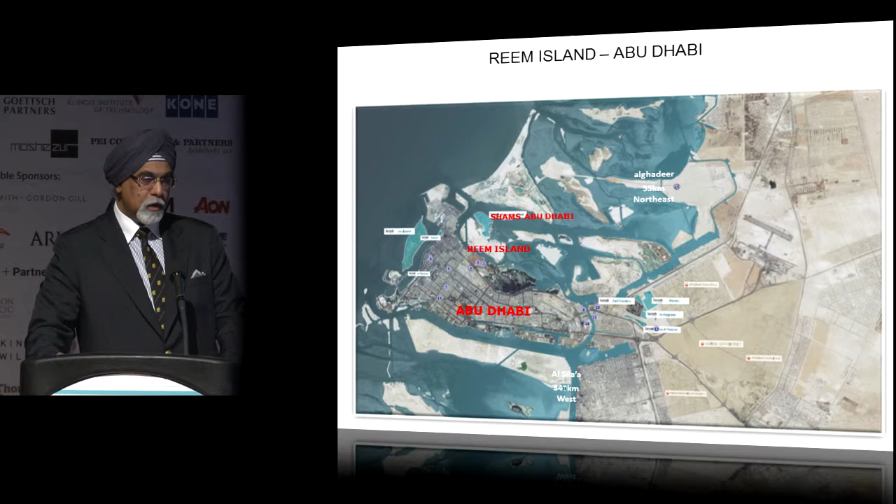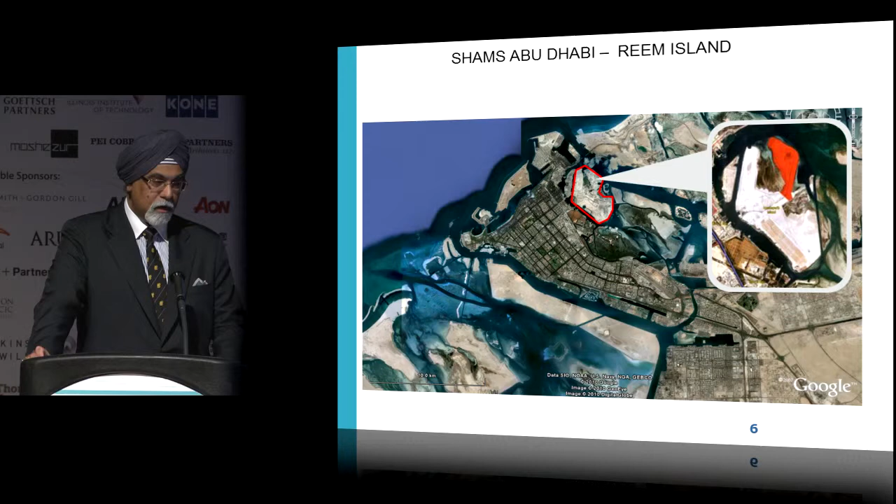Within the island of Abu Dhabi, there has been over the last few years an expansion of development in terms of new urban development as an extension to the CBD, and the Shams Abu Dhabi district is a newly created landmass that is adjacent to the current CBD, and it has formed an extension of the CBD in a very organized manner.

As you can see, the entire Reem Island, which is adjacent to the current CBD of Abu Dhabi, has three master developers developing the entire Reem Island. Aldar is one of them, and the slide that you see over here basically describes the Shams Abu Dhabi development, within which the Gateway complex occupies a very prominent and a narrow introduction to the Shams Abu Dhabi development.

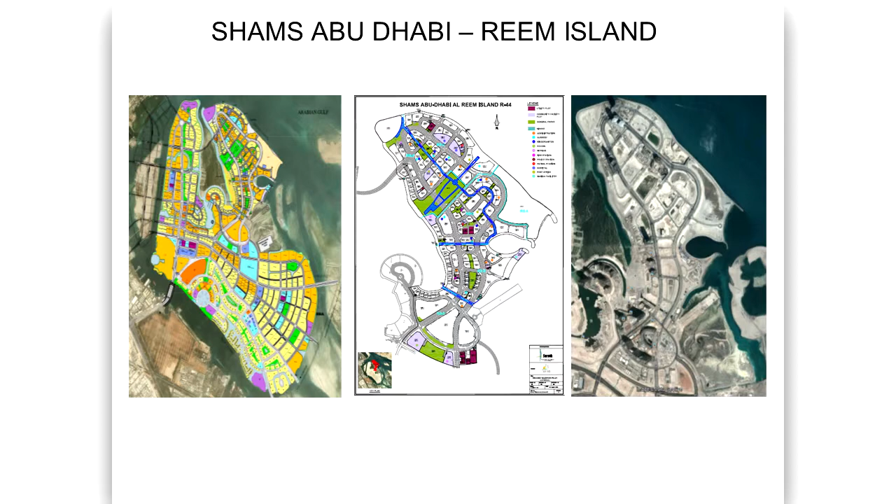If we try to look at it in more detail, you would see that the Gateway development comprises of three phases. The Sun and Sky Towers is the first phase, which is completed. The Gate Towers, which is the project that I'm going to talk to you about, and phase 3, which will be done at a later date.

Within the context of the entire footprint where the Sun and Sky Towers and the Gate Towers exist, the two towers, Sun and Sky Towers, are now complete, and I'm happy to say that it is about 95% occupied, and it has produced very clear, viable results for us. We have made a margin of about 21% on cost on this property, and an internal rate of return from the retained income properties that we have, including the retail and the office, of about 22%. So it has indeed proven to be a viable development.

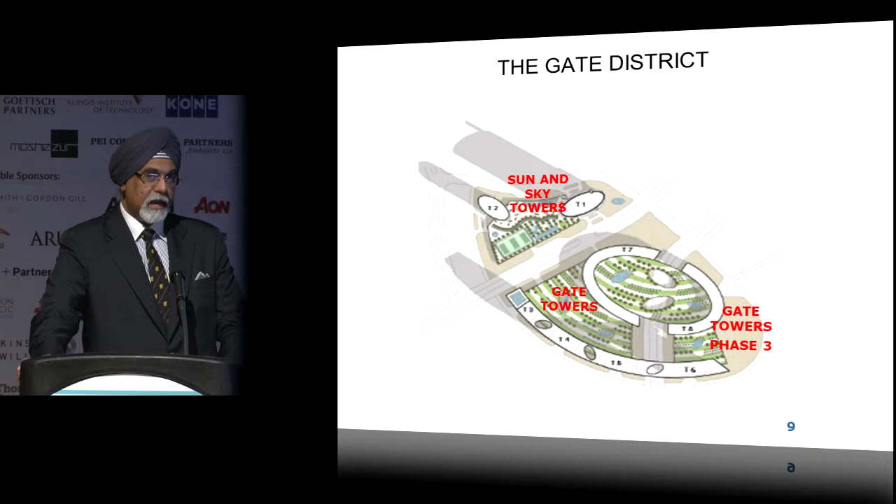And that set the stage for the creation of the Gate development. And this is particularly important because if you were to look at the entire context of the development in what we have done, the Gateway actually now forms basically one of the Middle East's largest developments at the present moment, and it signifies a very strong entrance to Shams Abu Dhabi.

All this started in August 2005 when the architects, Arquitectonica, began designing the project, and the concepts were developed in close cooperation with all the different stakeholders under a very tight schedule. So in August 2005, the design started, and in March 2006, the designs were completed, and the project was launched in April 2006.

I think on a lighter note, this may put to rest the question I'm often asked: did Marina Bay Sands design come first, or did your design come first? Who copied whom? I think it's not a matter of copying. We completed the design first. We had a staged process, with 3 phases of the entire gateway that needed to be carried out. We certainly carried out the Sun and Sky Towers first, and our gate towers came subsequent to that. Of course, Marina Bay Sands got built faster, so that puts to rest which project came first.

The complexity of the project needs to be explained a bit. It required a phased construction, which was very important. The first phase began with the Sun and Sky Towers, a pair of elliptical buildings. These were linked on the ground floor level to the gate towers, and the gate towers within the 3 tall towers are linked at the sky bridge level as well.

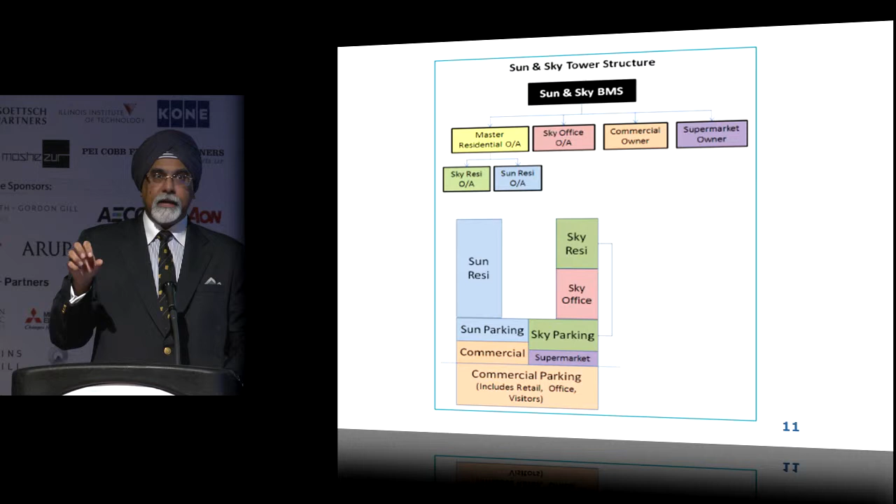A very important thing I wanted to mention is that before we carried out the designs of the Sun and Sky Towers, when the designers did their first sketches, we told them to take a back seat and re-look at how the building would actually be configured in terms of its ownership and management structure. We went into detail on how the titular structure of the development would be created, how to break up the different users within the development, and how we would eventually manage the 3 different mixed-use users in the Sun and Sky Towers, for example.

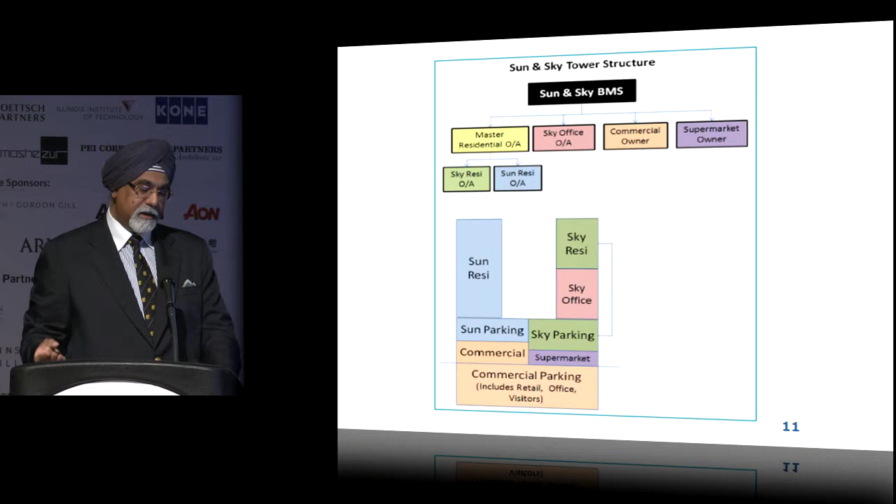Based on this, we started placing greater emphasis on the design. This is what was created at the end of the day and was eventually delivered, and now is being managed quite efficiently. As I mentioned, the KPIs have already been achieved for this particular development.

The Sun and Sky Towers were the first phase. A little description: they are residential, commercial, and retail in nature. The Sky Tower, for example, stands at 74 stories and is 293 meters in height. The Sun Tower is 65 stories and 232 meters in height. I'm also proud to say that the CTBUH acknowledged the Sky Tower as one of the nominees in the 2011 awards carried out in the last few years.

With the Sun and Sky Towers completed, here are some of the relationships within the gate tower. The gate tower has an arc building which is closely related, and this is the link between the Sun and Sky Towers and the gate towers at the ground level. We also have the link of the 3 towers at the sky level.

Some of the various services and amenities that have been incorporated into the Sun and Sky Towers set the tone and the standard and quality that we had to achieve in the Gate Towers as well.

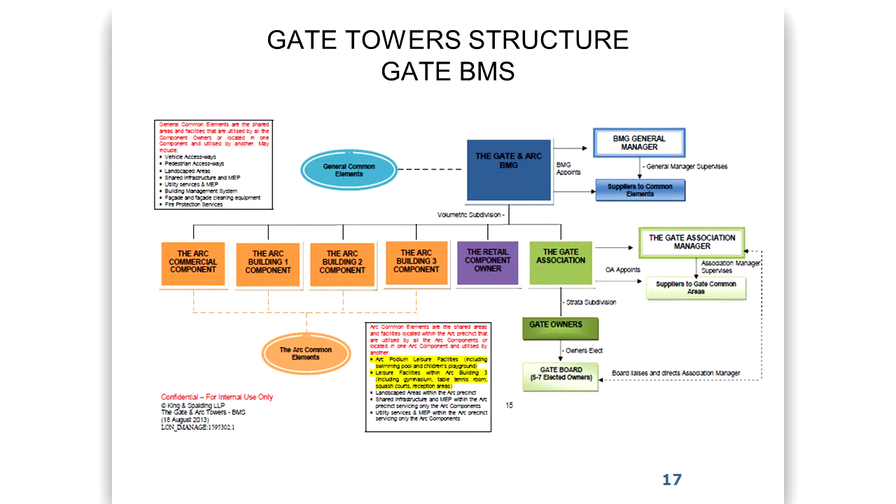This gives you a perspective of how we bring a viable product to the market, not only in terms of design, but meeting the objectives of a strong bottom line. Just like for the Sun and Sky Towers, we formed the building management statement in terms of ownership and management, and we did the same for the Gate Towers before Arquitectonica and the designers carried out the design. It's a busy slide, but you can see it in your handouts later. This formed the basis for the second phase of development.

The second phase of development is on the gate. This development comprises 3,533 apartments, and the towers are arranged in a gentle concave facing the rest of the island and the city.

These are some perspectives. The towers are rectilinear in plan and section, as a counterpoint to the elliptical nature of the Sun and Sky Towers. The Gate Towers plans offer a more regular apartment layout, supporting the development with a wider product range. As I mentioned, we had to change and be nimble, forming a different type of product to cater to the market at that stage, since the market was already slowing down for sales.

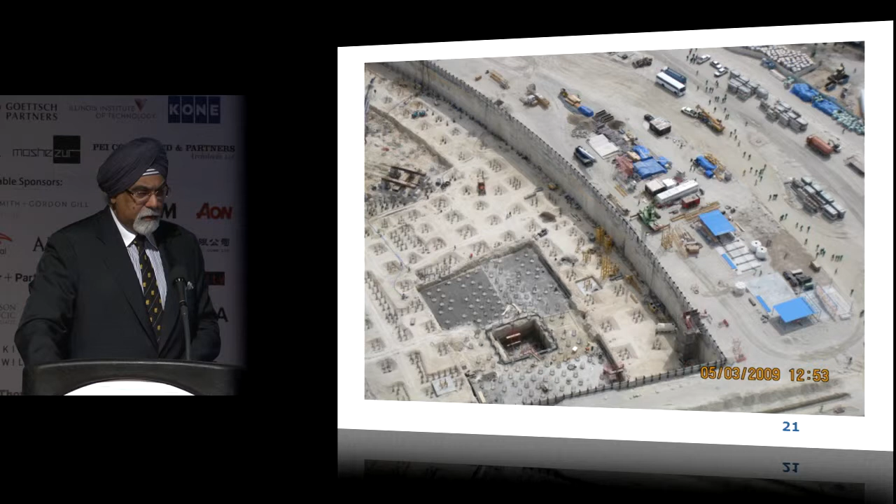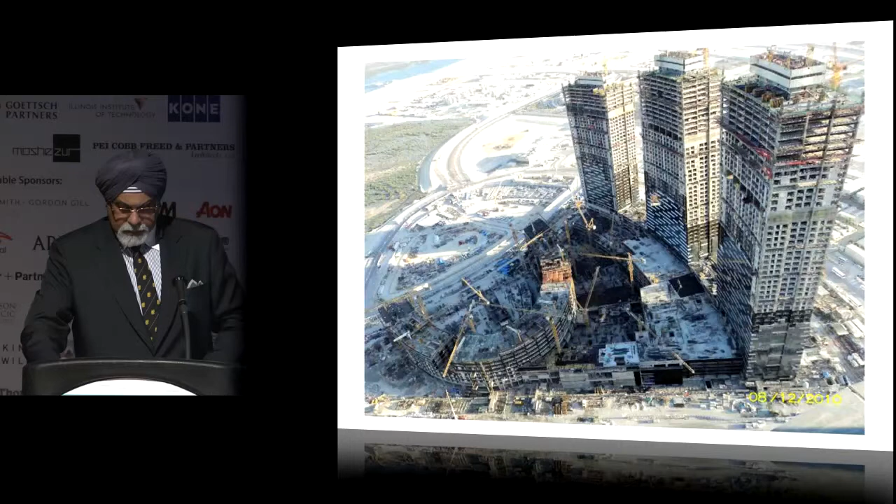Let me speed it up a little. Construction started in late 2008, early 2009. The Gate's structural design is a reinforced concrete system, and the foundation is a continuous raft extending over the full plot of about 6.7 hectares, sitting on top of about 4,100 piles.

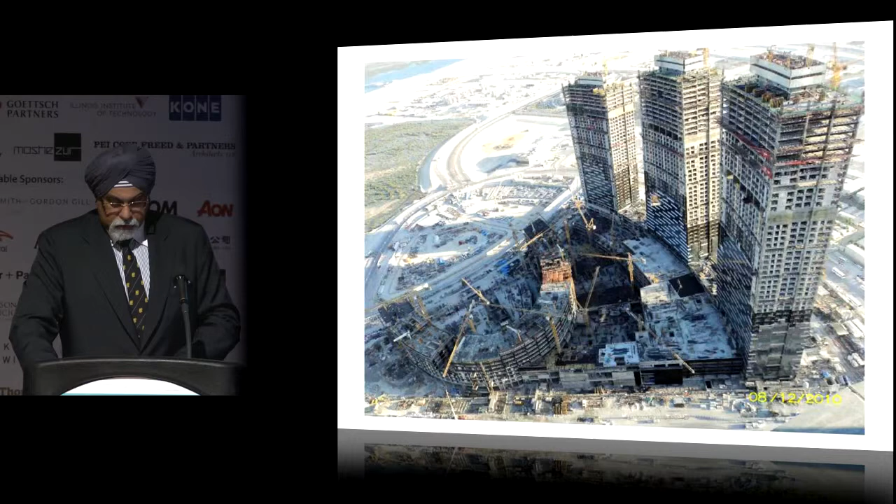The typical flooring system is reinforced concrete, with a podium and post-tension flat slab system incorporated into the entire development. Here you see the development at about 30% of its construction, and eventually when the 3 towers were up, one of the most significant things we had to do was connect the Sky Bridge.

As the development progressed, it stood in contrast to the Sun and Sky Towers, as you can see on the side. This development is by a different sub-developer on the island, and they have taken advantage of their proximity. The success has also spilled over economically to them, so it's created success not only for us but also for the other sub-developers within the development.

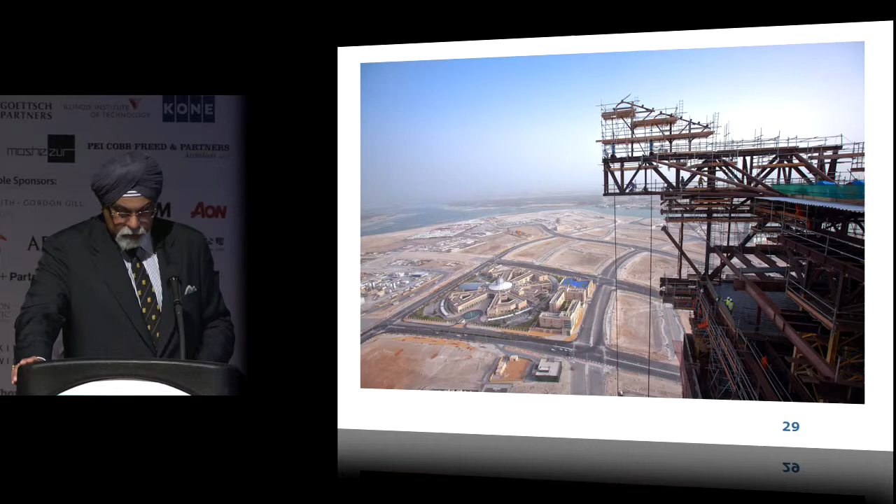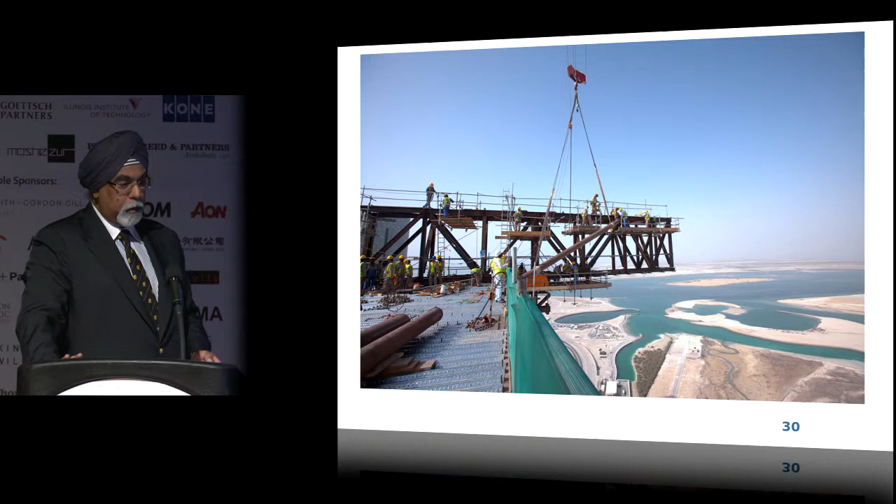The Sky Bridge is one of the most distinctive elements of the project. It connects all 3 towers and houses 21 breathtaking duplex penthouses. 16 of the penthouses will have an indoor pool overlooking the city. The Sky Bridge's length is approximately 300 meters, extending beyond the edge of the 3 towers by about 25 meters.

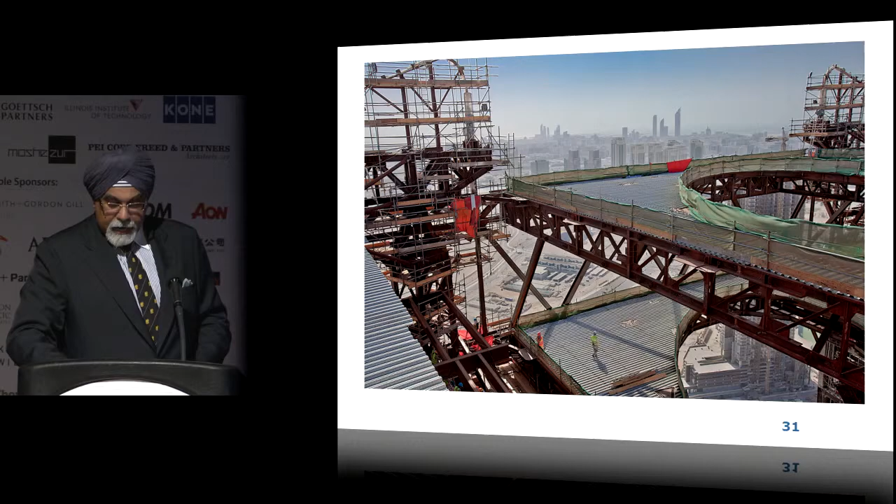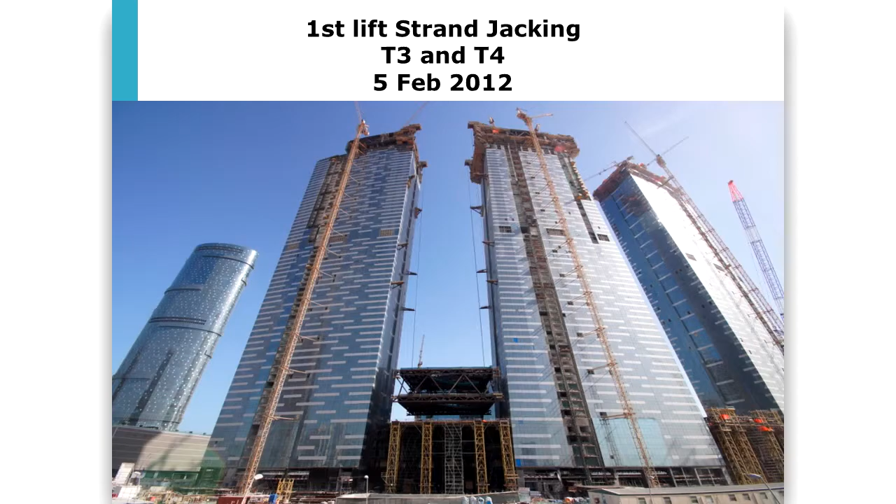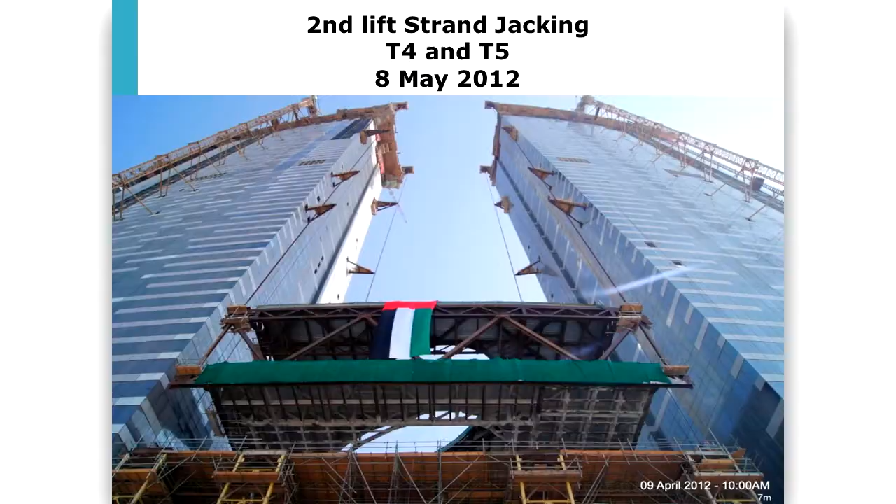What you're seeing here is the entire process through which we carried out the Sky Bridge lifting. It started in February 2012 - I'll quickly go through the sequences. The structure between the 2 towers was constructed at podium height level, then lifted through a strand jacking system. The contractor, Eversendai, is an expert in strand jacking and has carried out similar work for Marina Bay Sands and numerous other bridge projects throughout the world.

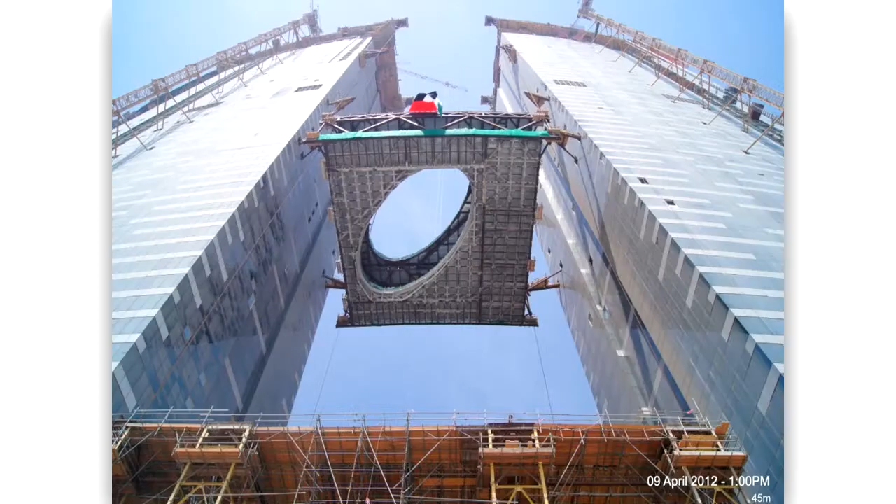What we had to do was assemble each one of these under somewhat extenuating circumstances, because it was summer and temperatures reached almost 50 degrees centigrade on the ground. And during that time, we also had to weather a number of very strong sandstorms.

Eventually we managed to complete the entire thing within a space of 8 months, and this encompassed 4 different strand jacking procedures for 4 different structures. Here you see the second last structure coming up, and eventually the last structure, which was carried out in May 2012.

The 4th lift essentially involved the cantilevered structure that was put in place, and eventually this was met with a lot of jubilation by the team, which worked very hard to carry out this very distinct and unique lift.

So in summary, at that stage, we carried out one of the highest, largest, and heaviest lifts for a residential property, for a real estate development, to date. I'm sure these records will be broken in due course, but certainly this had a lot of learning points for us in terms of the weather, the type of operational stability required, and the kind of crew and expertise needed.

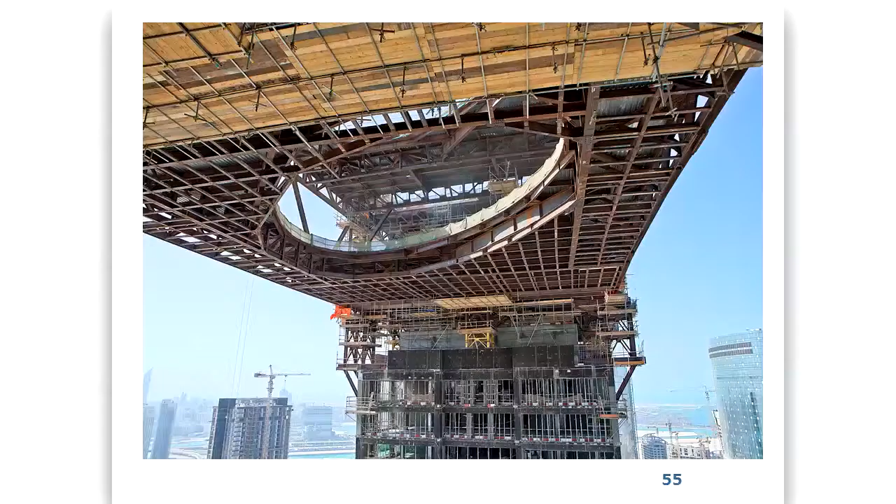So here you are, when the structures were put in place, you can see the oculi, which is a distinct form of the entire property. And once it was put in place, the real work began.

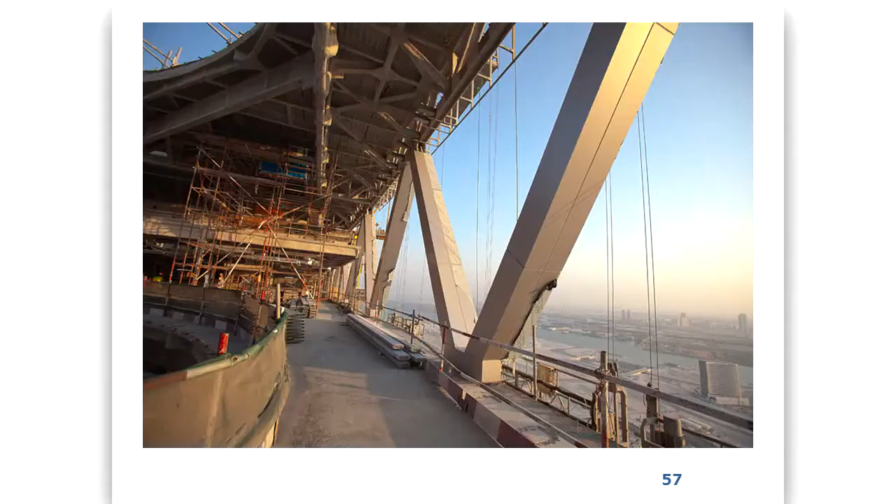Here you can see that there are two main trusses, one on each face, and they carry loads in the circumferential direction of each structure.

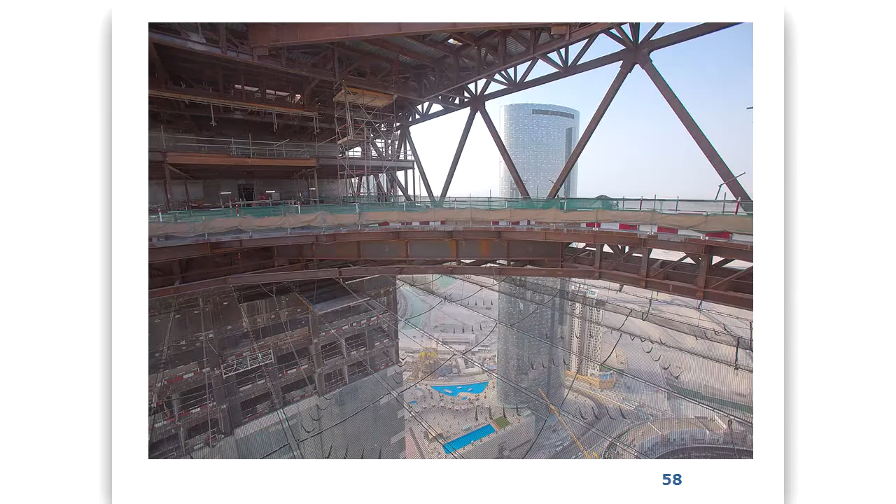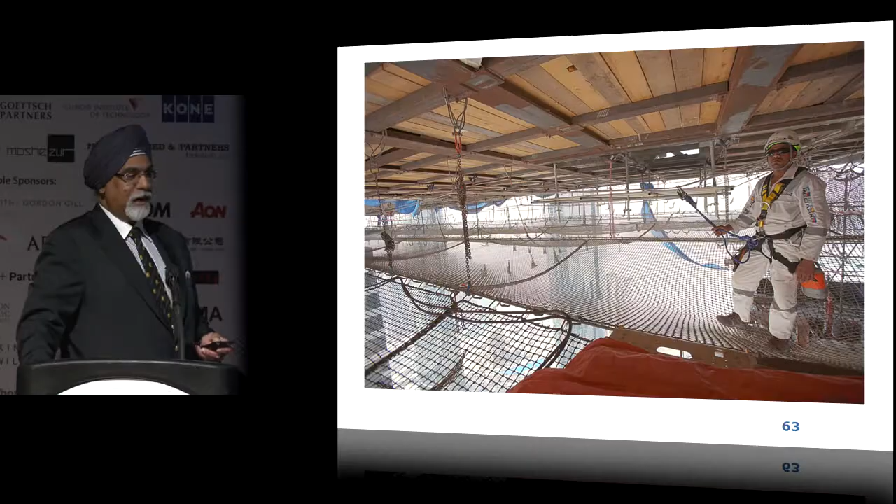I'm going to quickly show you some of the completed works. This is part of the oculi, which actually has a number of penthouses facing into it. It could be quite an exciting and dramatic experience for some if you're suffering from heights, but certainly from this location you have extremely interesting vantage views.

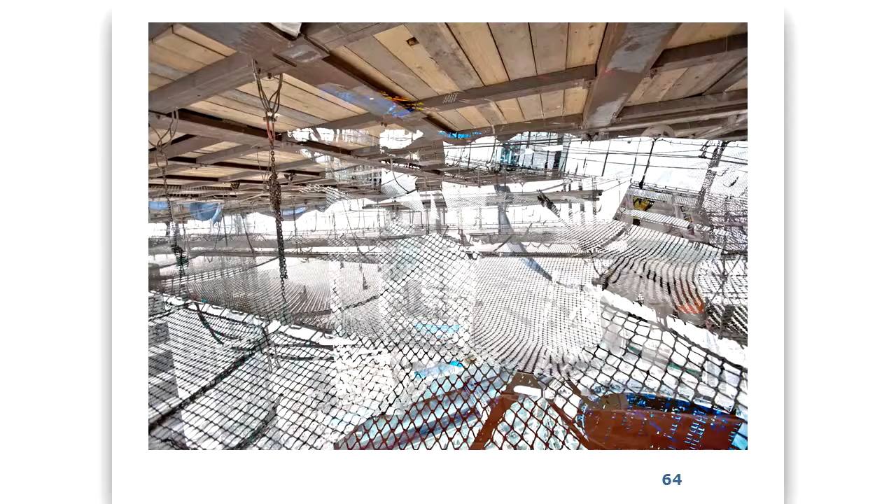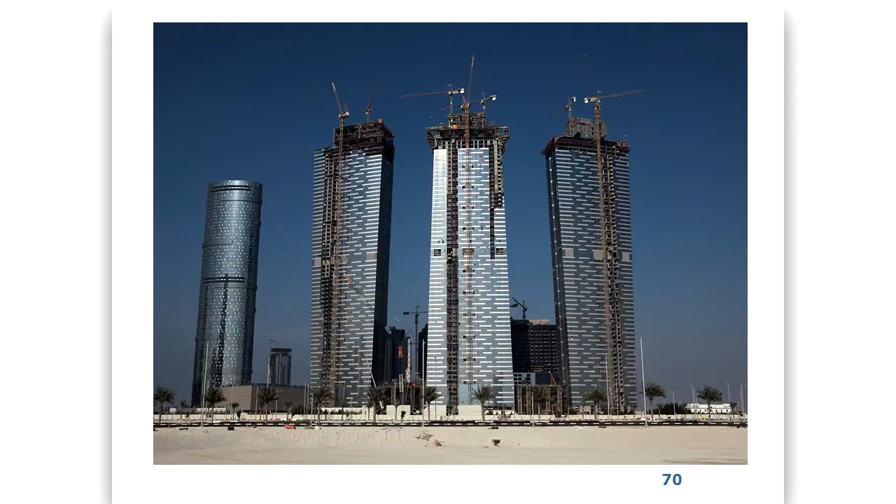So very quickly, this is what we had at the 70% stage, and then we carried out the entire lifting structure, and here is the completed property. You can see the oculi and the penthouses currently being feverishly put into place.

This is the last piece of the puzzle. We have actually obtained our completion certificates for the entire building except for the penthouse structure, which will be completed fairly soon.

So here is the completed product - the lobbies - and we are very happy to have incorporated very good services and facilities. I'm fully aware of the 5-minute warning, so I'm going to quickly go through this last bit, which shows the completed property, well-positioned, well-appointed apartments, to create the social sustainability we always aim for in a development of this nature.

So very quickly, I'm going to end with a quick 2-minute video, which will fall within the 5-minute time warning. And here you are - these are some of the completed works.

This is the real McCoy - the completed apartments, now ready to be presented to the various owners as we speak. They are being handed over.

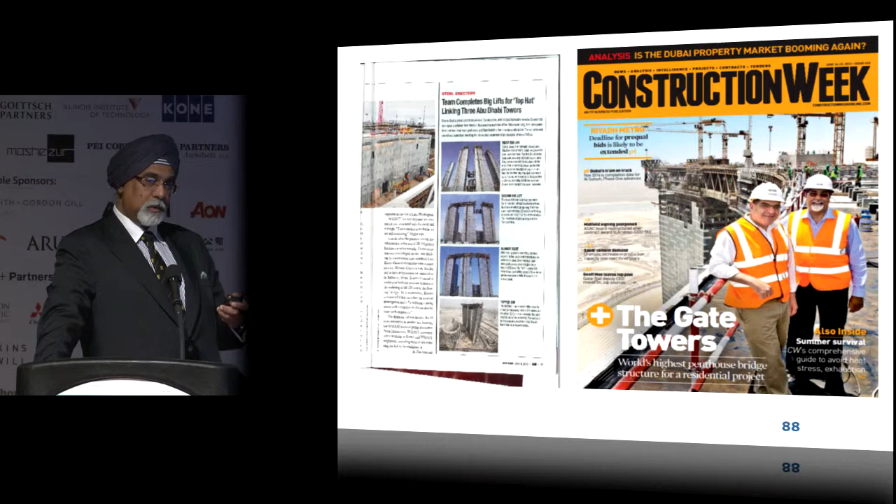This development has been featured in a number of magazines, and it has won 4 different international awards to date throughout the region and the Gulf. So the completed product - this is what we are seeing today.